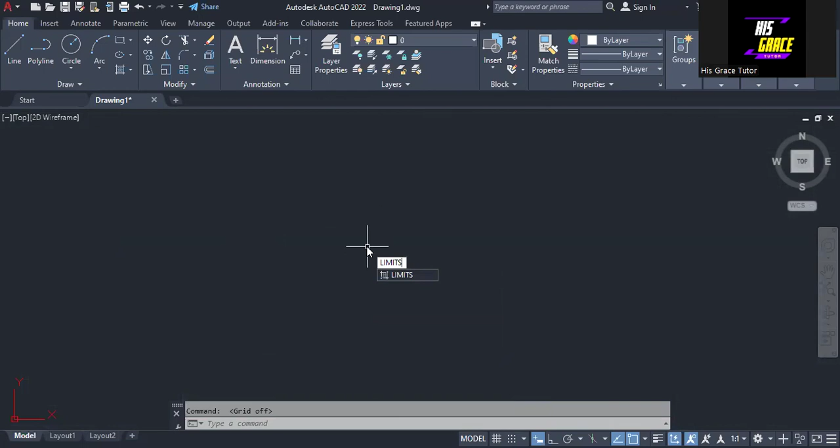The next thing we are going to do is set the limit of the working page. How do we do that? I will make use of the command, so I'm going to type 'limit,' then press enter on the keyboard. The first thing you have to do, I'll make it practical: type 0, comma 0, and press enter on the keyboard. The next thing we have to do is what the software is asking us to do.

We are to set the upper right corner. So my upper right corner, I'm going to use 150. Just press comma, then enter 100, then enter. The next thing we are going to do is type 'zoom,' enter, then type A on the keyboard and press enter. That's what we need to set the page, as we have done here.

The next thing we are going to do is go on and draw the parabola. The question I'm using here says the rise and span of the parabola are to be 60 and 140 millimeters.

I'm using the rectangular method here first. So let's start with the use of the rectangle method. For the rectangle method, I'm going to use the width of the rectangle to be 140. Let's make use of the dimensions as given. So look at where my cursor is—you need to put this on for you to draw a rectangle. That is the ortho mode.

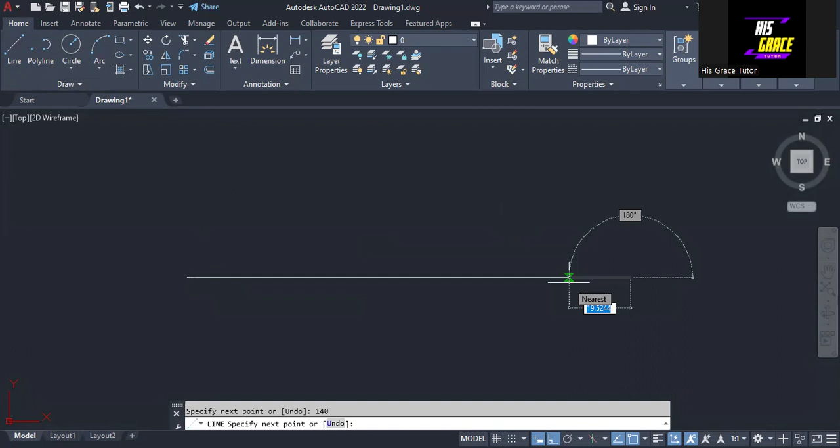Then you come to line, and we are going to draw a horizontal line of length 140 millimeters. So just type 140mm—well, I'll just assume that's in millimeters, it may not be sometimes, but this is 140. Then click on line again, or you can repeat line by right-clicking, or come here and click line again. Whatever you choose will work.

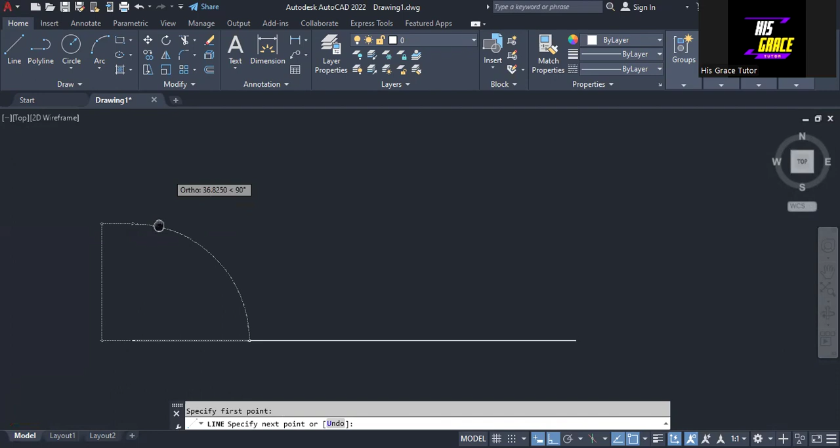Then I'm going to come to this point and draw a vertical line. So we divide that 60, which is the rise, by 2—that is 30. Okay, so I think I'll just make it 60. Just type 60 and enter.

Then we go in this direction again, 140. Then we come down here—you can click on this point, or press letter C on the keyboard and press enter. So right click and click enter, or select enter.

The next thing I'm going to do is draw a vertical line at the midpoint of this line. How do we get the midpoint? Just right click and repeat line—automatically you have the midpoint here. We should use the midpoint. You can see midpoint, click on it, and go up. Then right click and press enter.

So the next thing I'm going to do is label the points on the rectangle to make the work faster. I'll come to text and click on single line text. As the command line asks to specify the start point of the text, I'll click on this point. Next, I need to specify the height of the letter, so I'll type 2 and press enter. For rotation, since we're not rotating it, I'll type 0 and press enter. Then I need to put the text, so I'll type A. That's what I need.

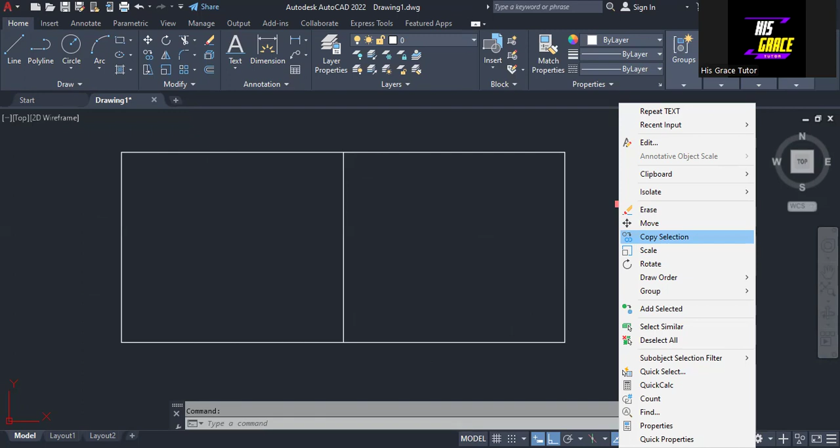Next, I want to label the points on the rectangle. I'll select this text, right click, and select copy selection. Before moving the letter to the next point, I need to turn off this ortho mode. Then I'll repeat the copy selection, move it, and bring it to this point.

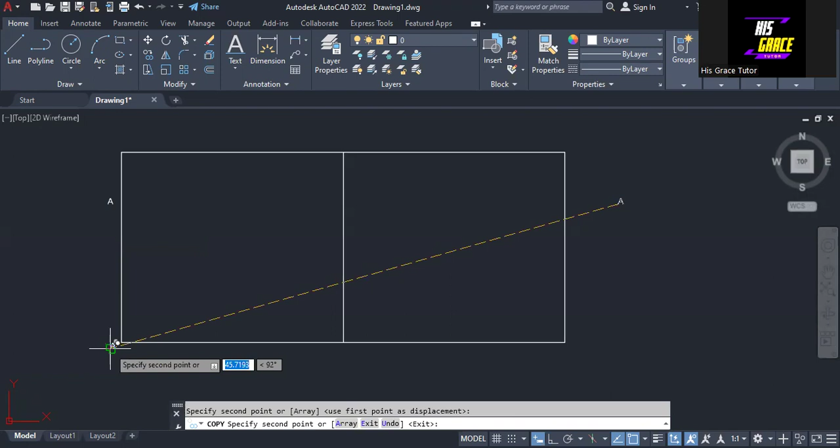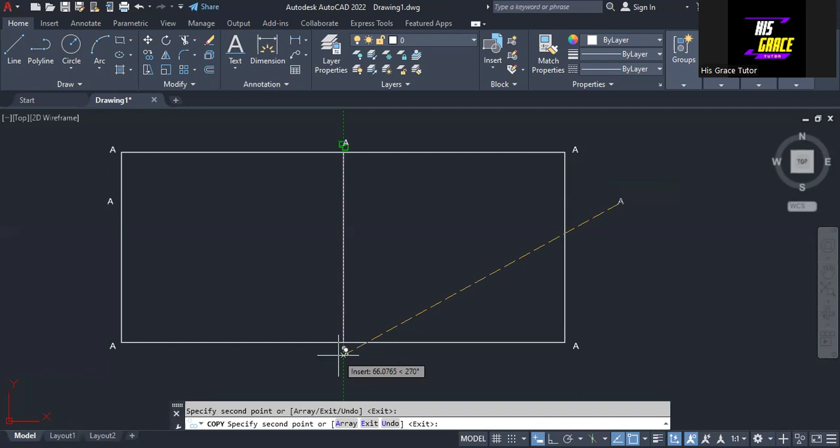I want to call this point A. Then this point, I'll put it here also, coming up here, and I'll put it here, and here, and here also. You may be wondering if I'm going to label all these points A - it is not so. I'm going to change the letters.

I want to erase this one, so I'll click, right click, and select erase. Now I'm going to change the letters. We already have A here, so I want B to be here. I'll click, select it, right click, then select edit, and type B. Then I'll come here again, select this, and edit it to be point C. Next I'll select this point and edit it to be D. Then the next point here, I'll edit it to be point E. Coming down here, I'll select this and make it point F.

So we have labeled each point that we have on the rectangle.

Next, I'm going to divide this line, which is 60, into a number of equal parts, and also AF into the same number of equal parts, and BF into the same number of equal parts. My decision is to divide line AD into 5 equal parts, line AF and BF into 5 equal parts, and also BC into 5 equal parts. Let's look at how we do that.

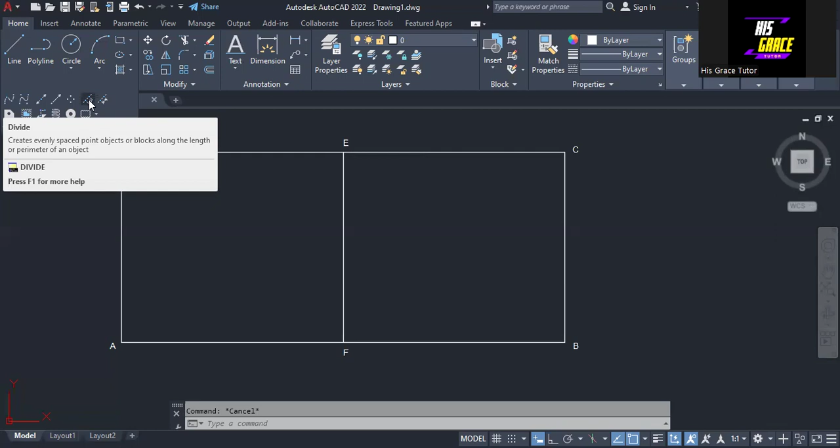We come to draw, then select this particular command that we use for dividing a line. We're asked to select the object to divide - this is the object, so I'll select this.

So we've selected one line, and I'm dividing it into 5 equal parts. Just type 5 on the keyboard and press enter. The line has divided into 5 equal parts - you may not see it, but it's already divided.

I'm going to repeat the same thing. Right click and select repeat divide, select this line BC, type 5 on the keyboard, then press enter. So it has been divided into 5 equal parts.

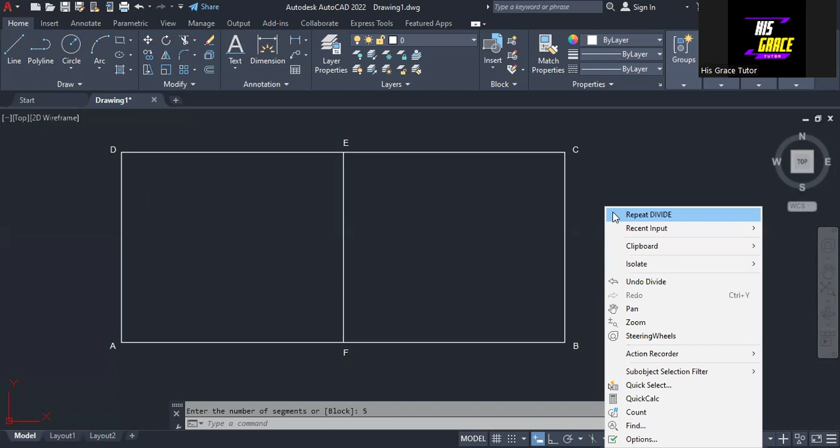Now the next thing I'm going to do is divide line AB into 10 equal parts, because AF and BF are equal in length. So I'm dividing AF into 5 equal parts and BF into 5 equal parts.

I can go directly dividing line AB into 10 equal parts. Repeating that division command, I will select line AB as I'm being told to select the object to divide. I will select this, then type 10.

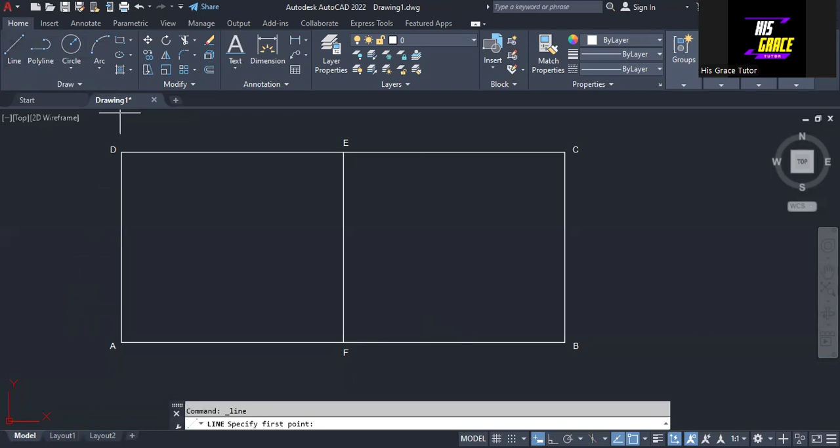Okay, so that's it, it has been divided into 10 equal parts. Next, I will select the line command. Coming to this point, this green marker is one of the points of the division. I just click on it and then join this point to point E.

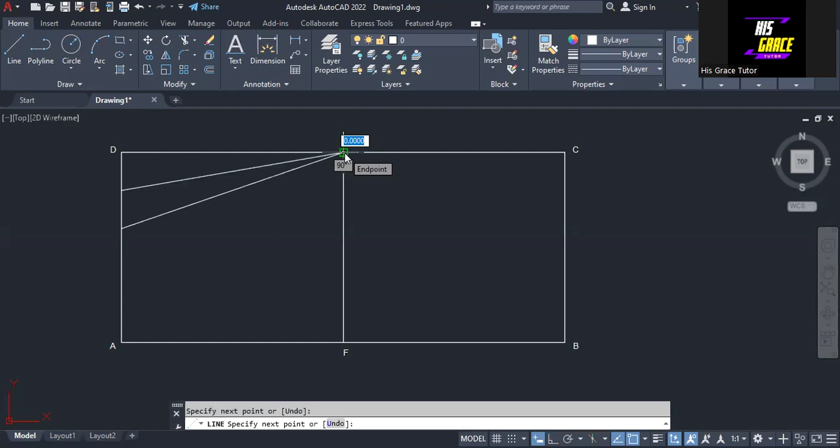That's done. Next I'll repeat the line command, just right click and repeat. We have another point here, so join it to point E, then enter to repeat it. I'll continue to do that, then right click again, repeat line.

If I want to draw the fifth one, I can just take it from here up, but that doesn't need to happen. So I will repeat the same thing on this side. From this point here, join it to point E, then repeat it. We come to this point here and join it to point E.

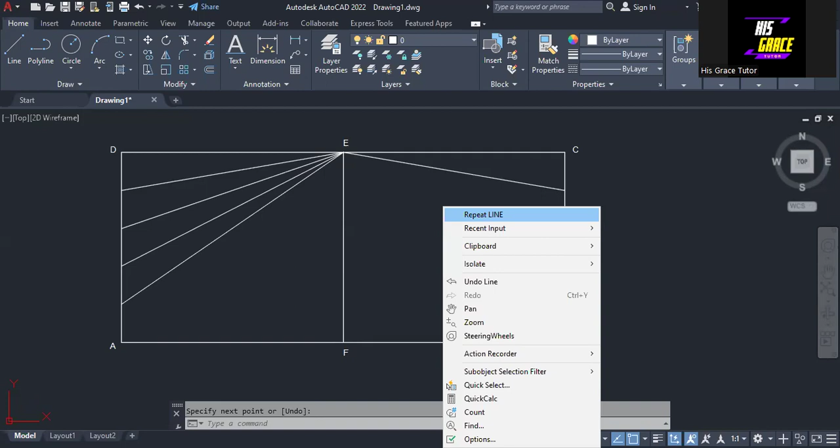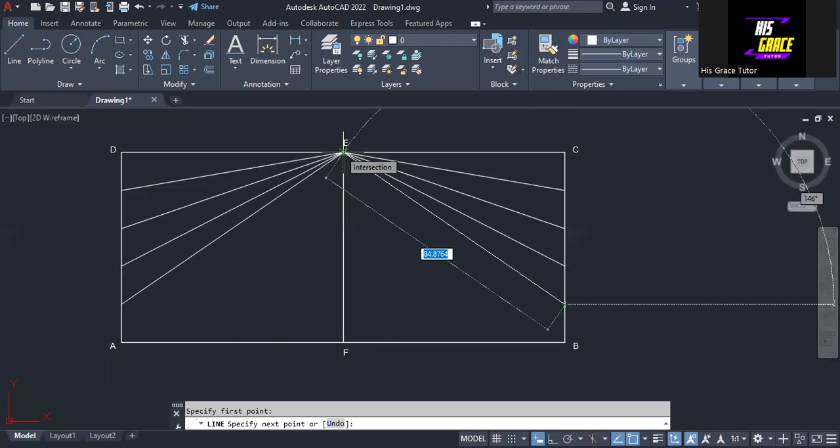Let the cursor change to that green box or square, then right click and press enter to remove the line. Right click again, repeat line. Come to this point and click on point E, then repeat line again. We join this point together with point E here. Okay, that's it, enter.

Next, we are going to repeat the line again. We have a point here, but before that, I need to turn on Ortho mode because I want to draw a vertical line on each of the points on line AF and line BF. That is what I want to do. Now I will select line again.

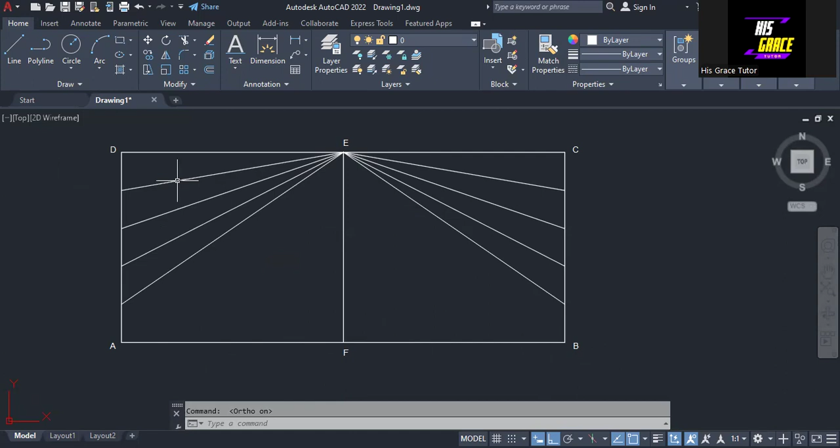If you don't select the Ortho mode, it will not give you the right vertical line. The line will not be vertical, so there may be error. That's why you need to activate the Ortho mode, whether you are drawing a horizontal line or vertical line, it has to be activated.

Now we come to the first point here. Once you get there, you see the cursor change and a node as a sign that there's a point there. Just click on it and it goes up. This is line 1. I'm still going to number each of the points.

So we have this point, right click, enter, then repeat the line again. Here we have another point, connected to the second line. Be watching the angles - if you look at the angle between this horizontal line and the vertical line we just drew, it is 90 degrees. So you can just click on the line.

Then the next one, repeat the line. You come to this, the third point, so you can drop it here. That's it, so then we repeat it again. Okay, this is the fourth point, so just drop it here.

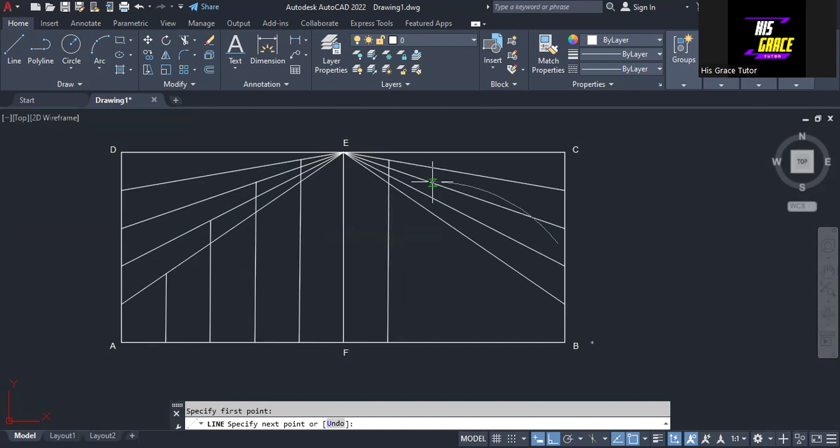Okay, that's it. We are going to repeat the same thing on this side. So we repeat the line - the first one, line 1. Right click and then repeat it again, just right click. So then we have another point here. Okay, so then we repeat it again, right click and select repeat line. This is the third one.

Okay, so we repeat again and come to this point. So here is it, all right, that's it. So we have each of the points. Now let's do the numbering of the points. I'm going to make use of these letters, but I will change everything to numbers.

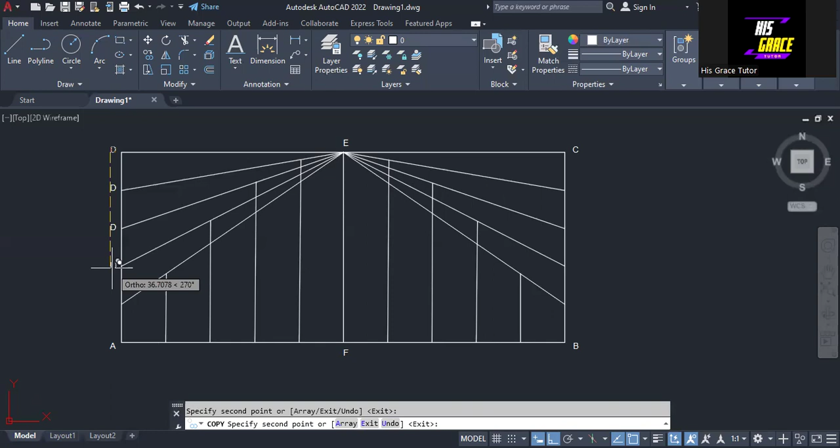Right click and select copy selection. So I will take this point, this point, this point, and this point. So this is the fifth point. I want to number it also, though that's not okay. So let me remove this one.

Let me use this, copy selection. I don't like how the letter is, so I'm going to do that again. Copy selection. All right, so this is okay.

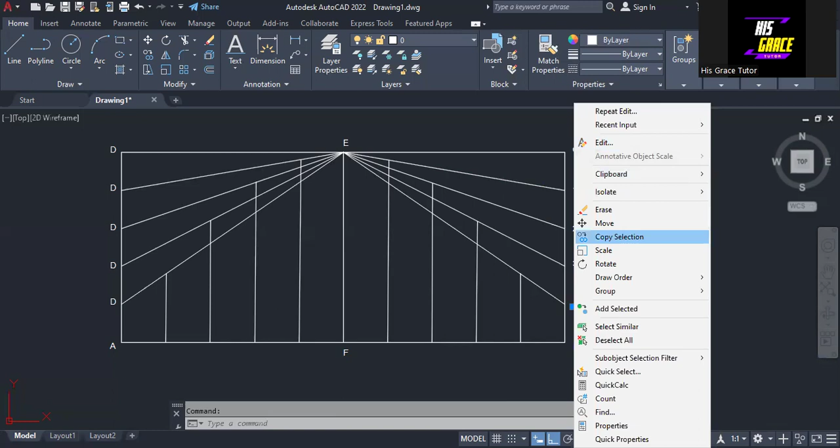And then for the fifth one, I'm going to select this and copy selection to bring it down here, just to have the fifth point there. Maybe I should just leave it. So I will leave it. All right, so we have this.

So then we come to this side, we do the same thing. Here is one, there is two, there is three, and this is four. So we have this. Then we also need to label the points here. I'm going to pause the video and do that.

Or let's do it together, so that you can see how it can be done. What I need to do here is select this and copy selection, then move it. So here we have it.

All right, so then I'm going to edit each of them. This is 4 prime. Here is 3 prime. This is 2 prime. And this will be 1 prime.

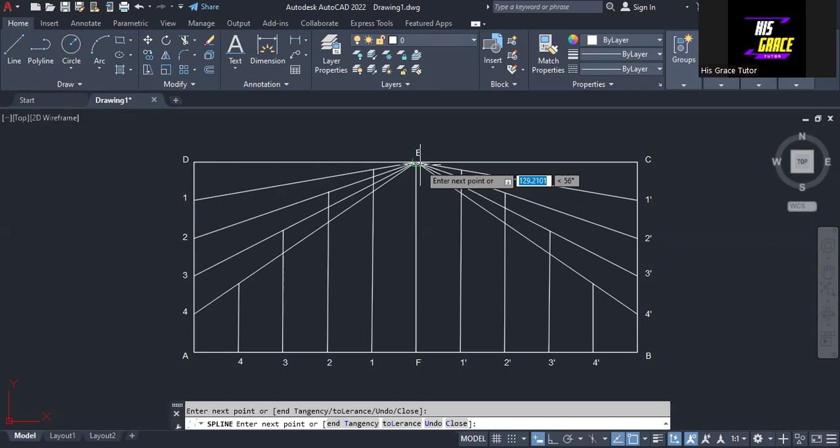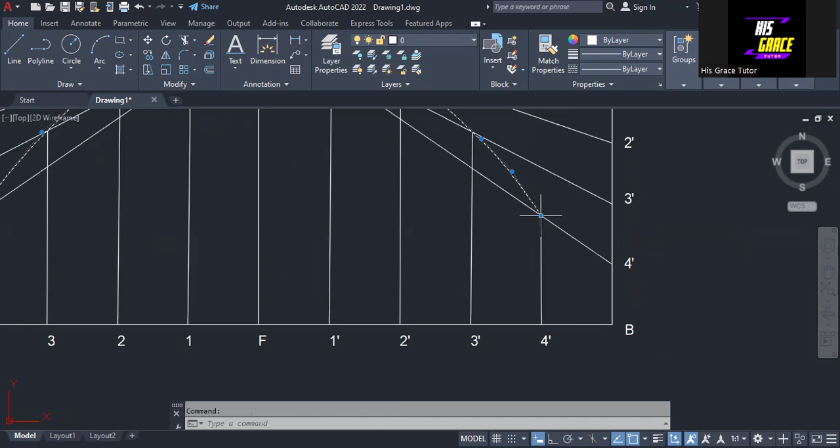So there's another point here, then we have this point B. Right click, enter. Looking at what we have here, the curve goes a little bit out of what we want, so select trim and trim it. All right, it's cut off a bit, so I'm going to stretch it from here. Just select the curve and move it to this point. That's it. Right click, deselect. All right, so we have the curve now.

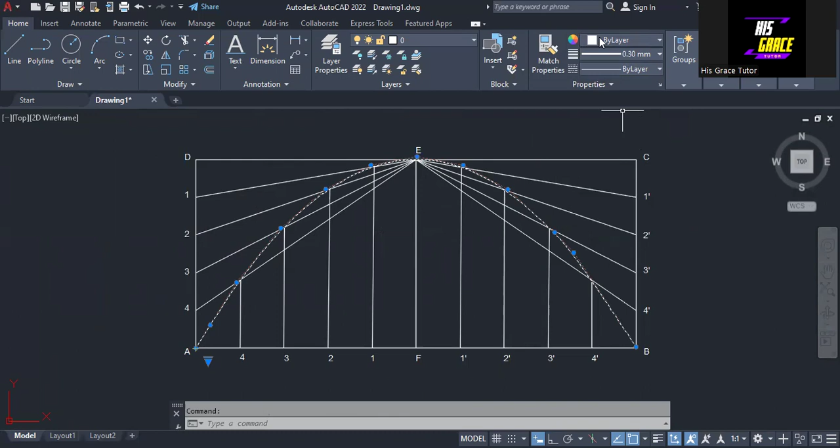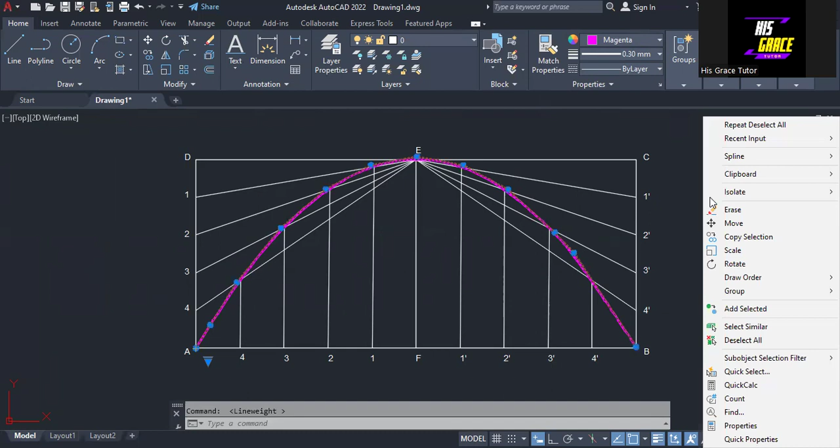Next, I want the curve to really show very well, so I'm going to select it, come here and select this particular type of line or layer. All right, it's already there. Then I'm going to change the color to this. Then to make it more visible, I'll come here and click on lineweight, this particular icon. That's it, right click and deselect. You can press escape to deselect it, no problem.

Okay, so this is the parabola. It's as simple as I've done it here. All you have to do is practice, and when you practice this, you become a master at it. So we meet on that of ellipse and the other ones again. Thank you and God bless you.